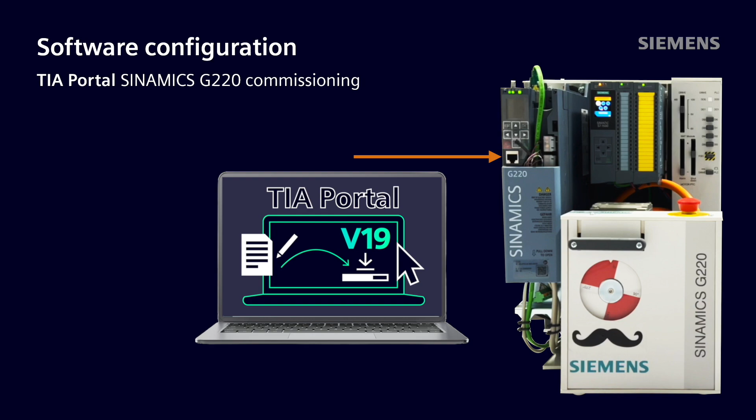Start by connecting your Ethernet cable into the front port of the SINAMICS G220 drive and into the Ethernet port on your computer. Open TIA Portal and create a new project file. Click Create after naming it. Click on the Project View button at the bottom bar.

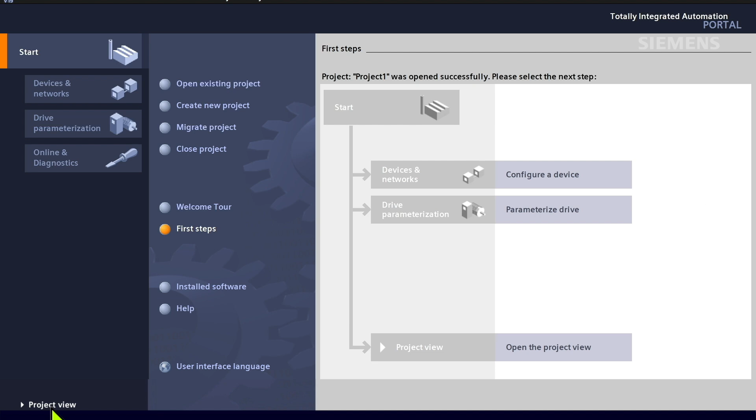Select Online Access. At this point, you'll need to select the Ethernet interface port on your computer where you plug the Ethernet cable into. Our interface in this video is the Realtek USB GBE family controller adapter, so we'll select that. Then double-click on Update Accessible Devices. The IP address of the part should appear.

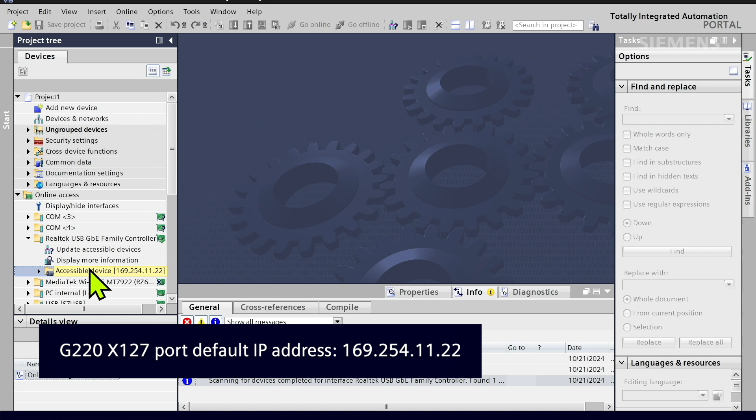The default IP address of the G220 X127 port on the front is 169.254.11.22, and the default subnet mask is 255.255.0.0. You will need to ensure the IP address and subnet mask on your computer Ethernet connection are compatible.

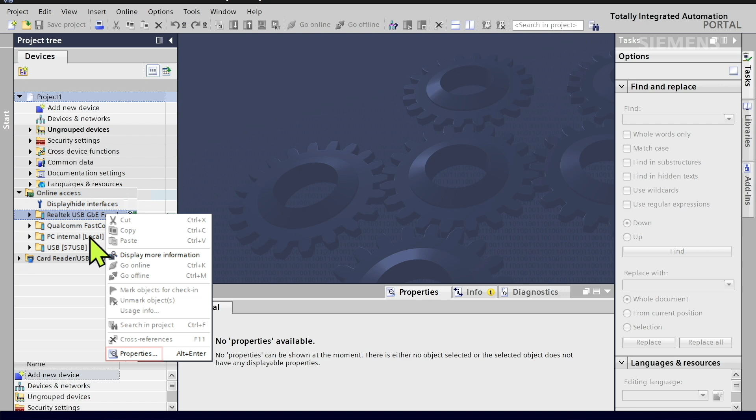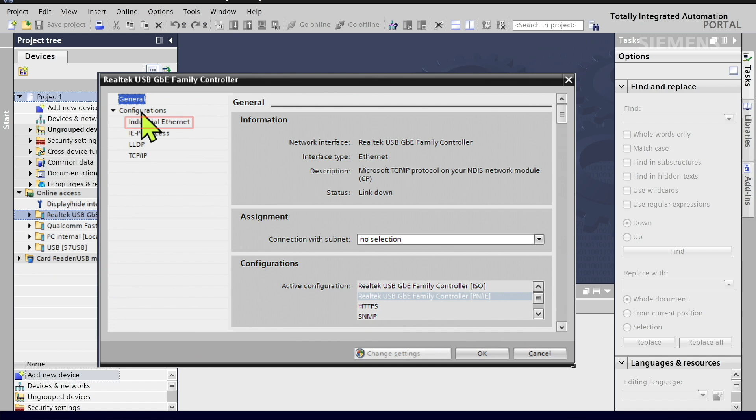To view your computer Ethernet connection settings, right-click on your computer's Ethernet interface and select Properties. Then select Configurations. Then select Industrial Ethernet. At this screen, you can view and adjust your computer's Ethernet port IP address and subnet setting to ensure compatibility

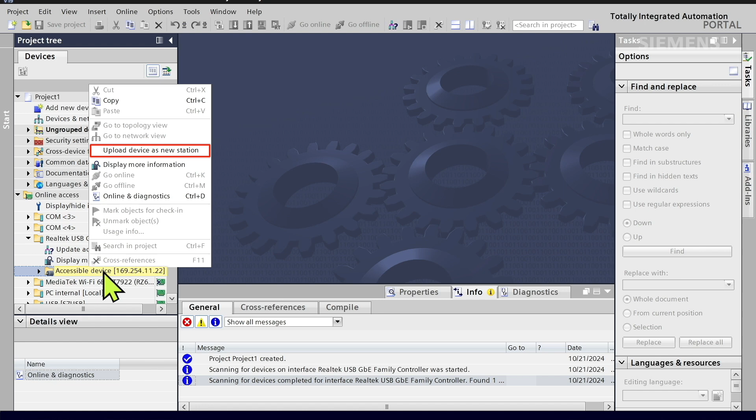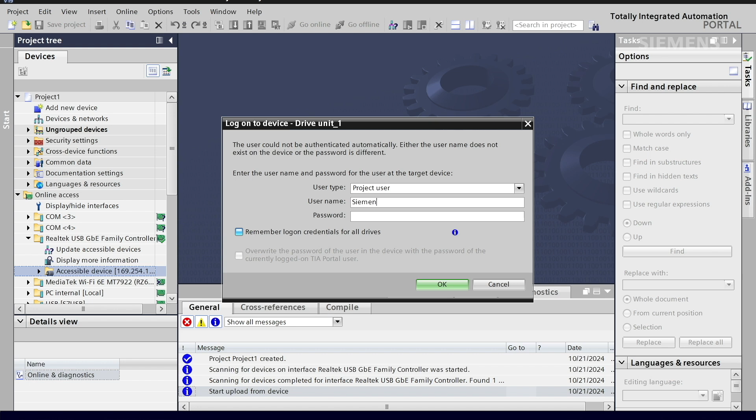with the G220 drive. Right-click on Accessible Device and choose Upload Device as New Station. Allow the connection by clicking Connect. Create a username and password. It is recommended to check the box Remember Logon Credentials for all drives, and click OK.

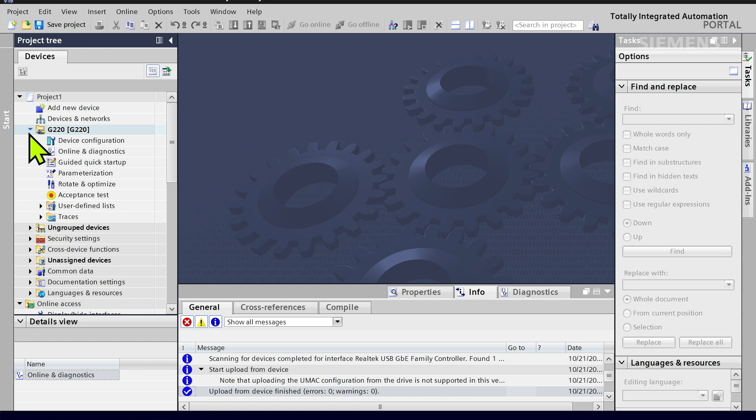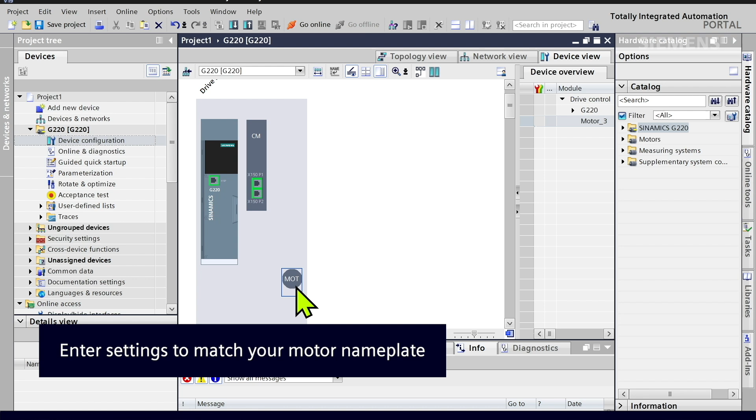Under your device, double-click on Device Configuration. You may need to grab the bottom of the window and drag down to see the MOT icon. Double-click on the MOT icon to configure motor settings to match your motor nameplate. And then resize again to see the motor detail menus to enter your motor parameters.

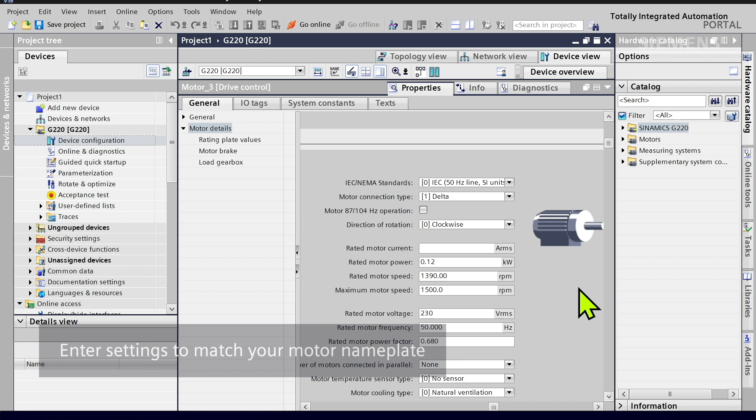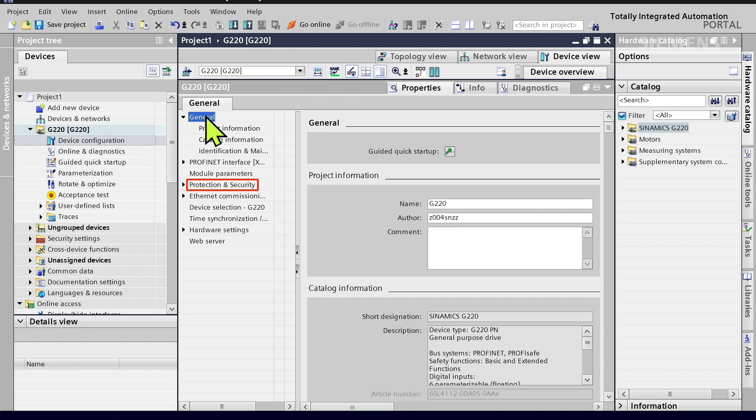Click on the drop-down arrow to minimize the motor parameter screen and get back to the G220 device view. Now you need to set up protection and security. Click on Device Configuration, General Properties tab, Protection and Security. Selecting the Start Security wizard will walk you through security settings.

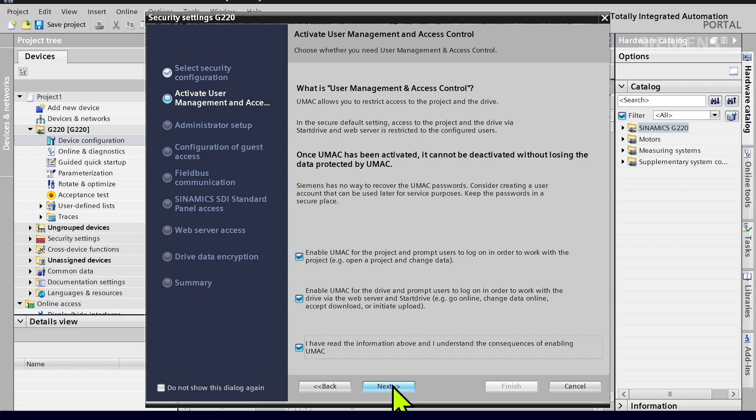User Management and Access Control, or UMAC, access to the integrated web server via the Fieldbus or Service Interface, and Drive Data Encryption. Click Next to edit the current settings. Enable the UMAC options you want, and confirm that you've read the information above. Feel free to pause this video if you want to read details.

If you are looking for more information, you can open the Help window in the TIA Portal and type in Cybersecurity, and you'll be led to the link for the SINAMICS Industrial Cybersecurity Configuration Manual. Enter a password to encrypt sensitive drive data.

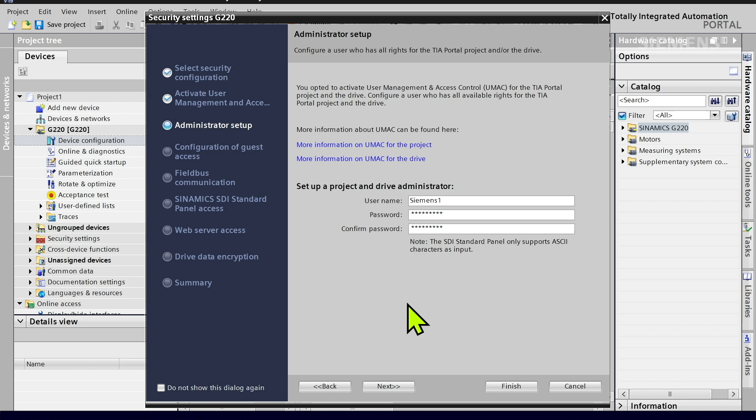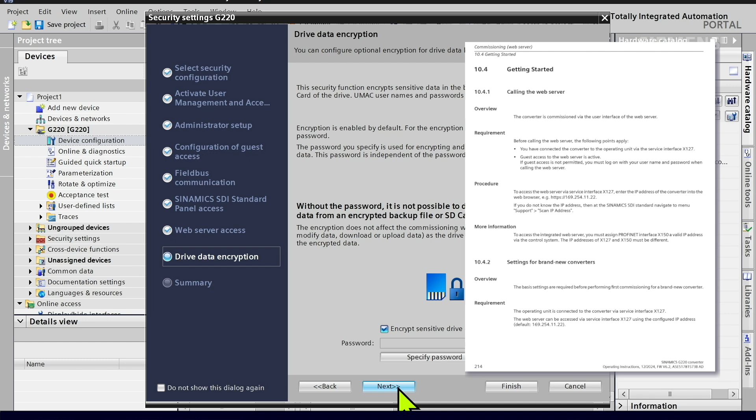Click Next. If you want others to have access to the drive, enable it here, and click through to choose security options specific to your situation. You can also refer to the Getting Started section of the SINAMICS G220 operating instructions for more details. Review the summary. Be sure to read the warnings about users and passwords, then click Finish.

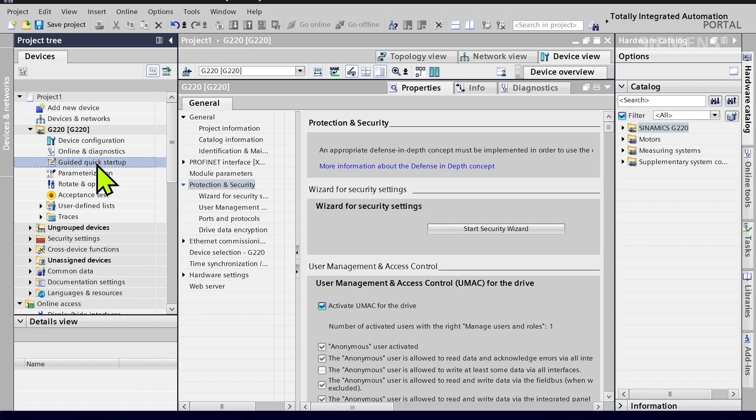We are now getting ready to start the motor. Double-click on Guided Quick Startup under the device name where we'll be entering some basic drive parameters. You might want to optimize the size of the window. It should default to Define the connection to the PLC. Click Next as we are not connecting to a PLC.

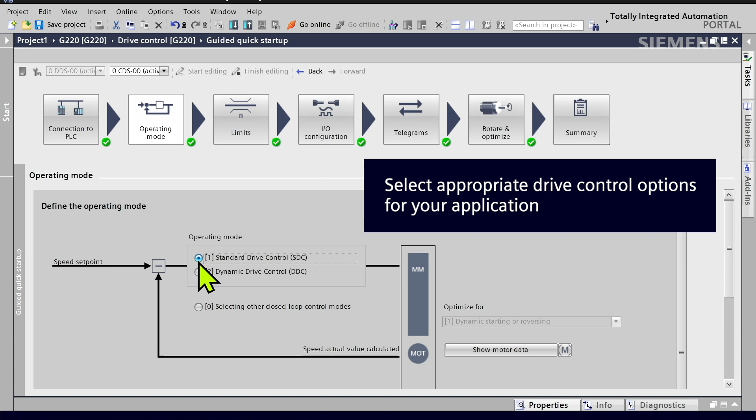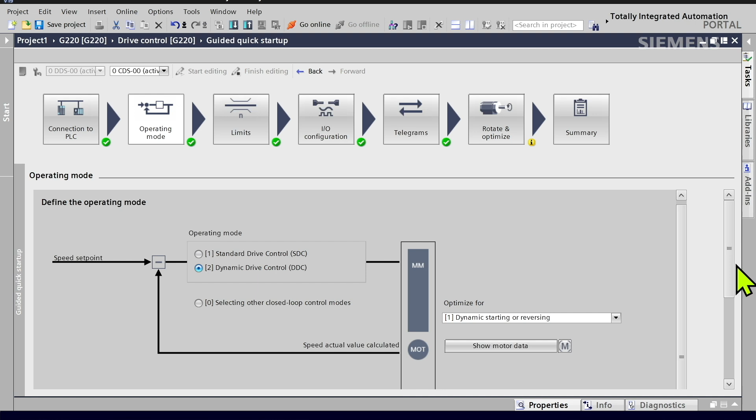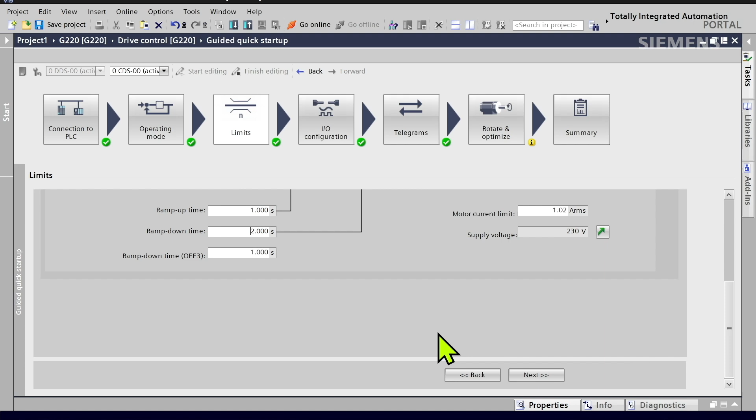For operating mode, select the appropriate drive control options for your application. And select Next. For limits, set max and min speeds and ramp times needed in your application. And select Next. For I/O configuration, select the I/O connection types that you intend to use.

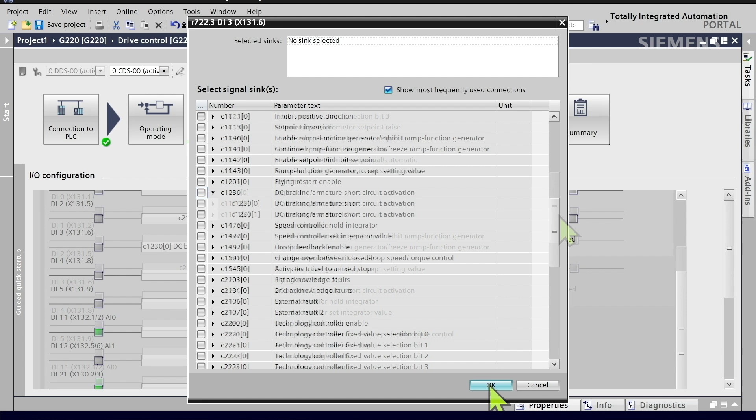You'll notice that there are many different parameters that could be selected. Select Next when you are ready to proceed. Telegrams can be used to define data transmission when connecting to a PLC. Since we are not connecting to a PLC in our example, we'll leave this set as No Telegram and select Next.

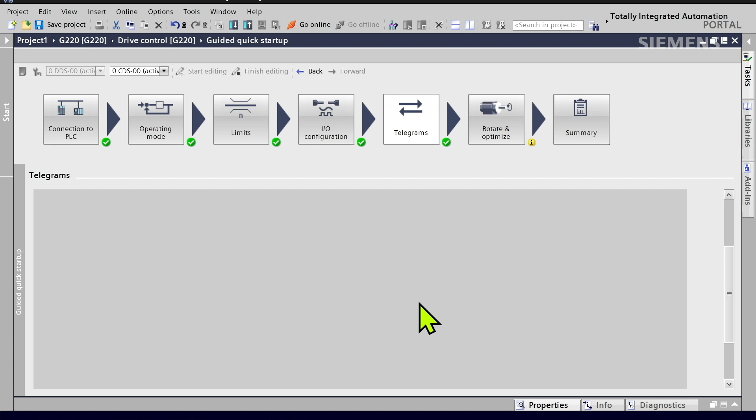The Rotate and Optimize section offers several application-dependent choices for tuning motor performance. Motor characteristics can be measured at standstill or while rotating the first time the motor is switched on. For the purposes of our demo, we will select No Optimization and select Next.

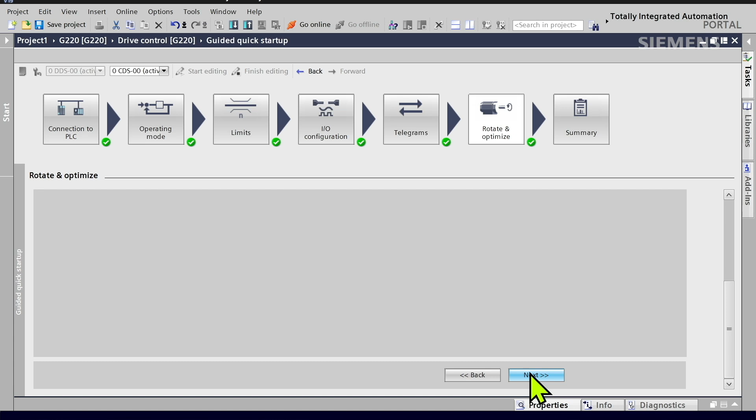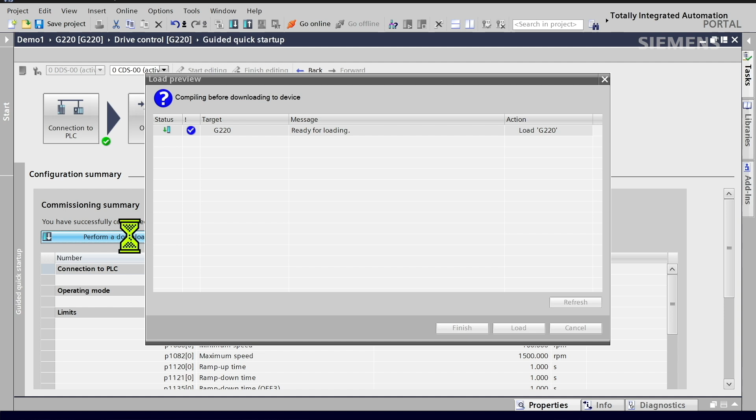The Summary tab lets us review our configuration and download the setting to the drive. You can click on any of the configuration steps and change your choices. After you are satisfied with your choices, click Perform a Download. We'll download the UMAC security settings we established and select Load.

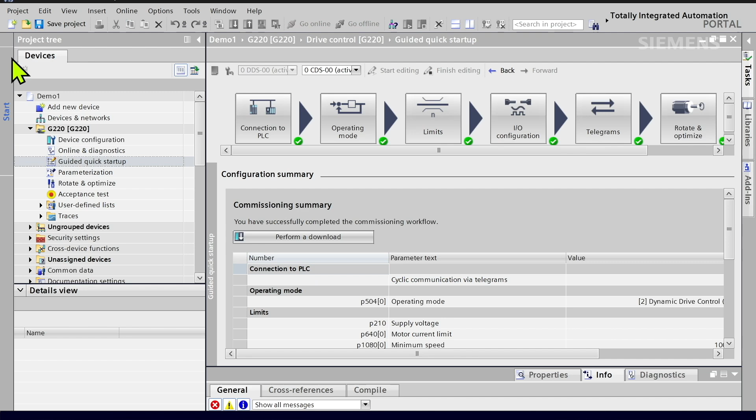Right-click on your drive name and hit Go Online. Double-click on Rotate and Optimize under your drive unit. Under Master Control, click the Activate button. This window provides a warning that you are about to start the motor. The 2000 millisecond monitoring time works well for simple demo units. Select OK to confirm.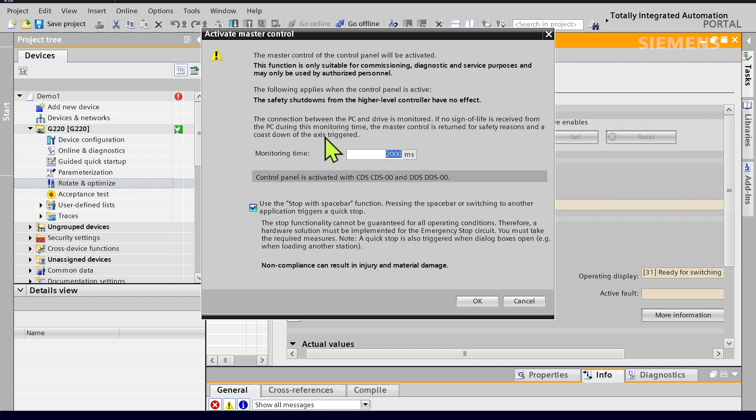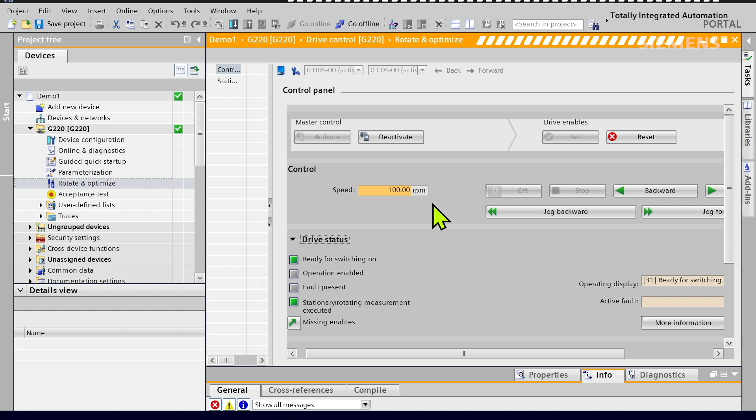Click Set to enable the drive and On under Control. Here you can see the available options for controlling the drive. Note the speed reference of 100 RPM. Let's make this window a little bigger so we can see our drive status and actual values.

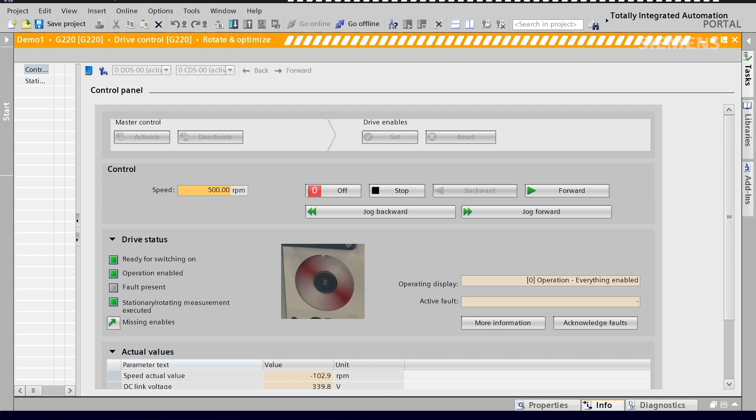Note the green arrow status, indicating choices of backward or forward or motion jog options. Once we select forward, the motor starts, and we can see our actual values change accordingly. We can reverse motor direction here, and the speed reference can also be modified. Congratulations! You've worked your way through one of the ways to configure a SINAMICS G220 drive.

Thanks, Scott, for giving us that play-by-play, and thank you for taking the time to watch this video. I hope it gives you a better understanding of how to commission a SINAMICS G220 using the TIA Portal. If you're looking to elevate your machines and equipment or processes to be a part of a more secure, digital, and sustainable future, I believe the SINAMICS G220 variable frequency drive can help you accomplish that.